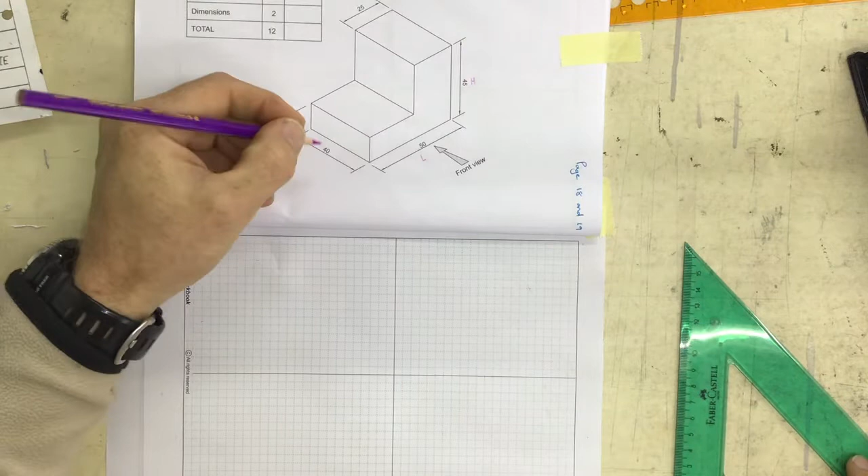Looking at this first angle orthographic projection, they've given us a front view which gives the length of 50 and the height of 45, and you've got a width of 40. I'm going to start out by getting those three major dimensions.

I'm going to measure up 2 blocks, starting point over there, and measure with a construction line, drawing that line coming across, then measure out 50 millimeters because the length is represented in my front view.

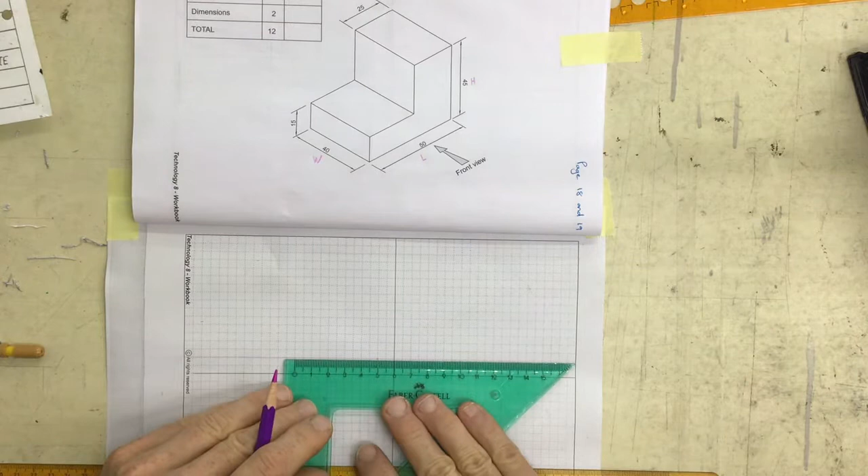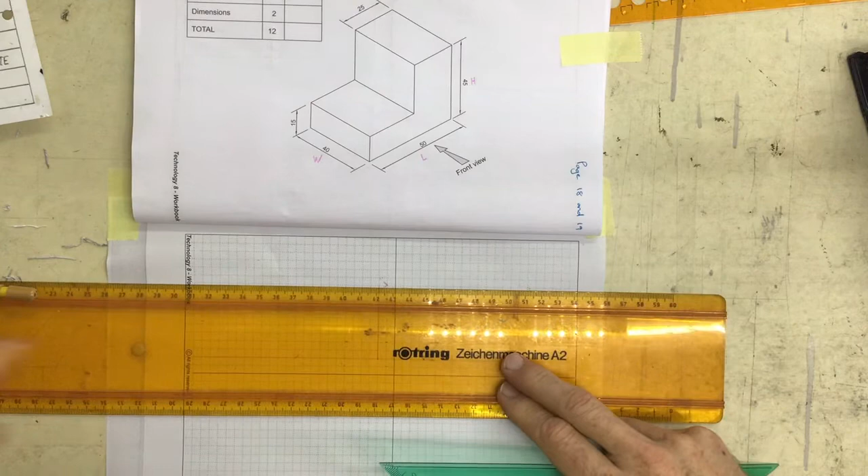Make a little arrow there. I then measure up 45 millimeters, that would be over there, and I can draw a construction line going up 45 millimeters to that point, then draw a construction line coming across at that height.

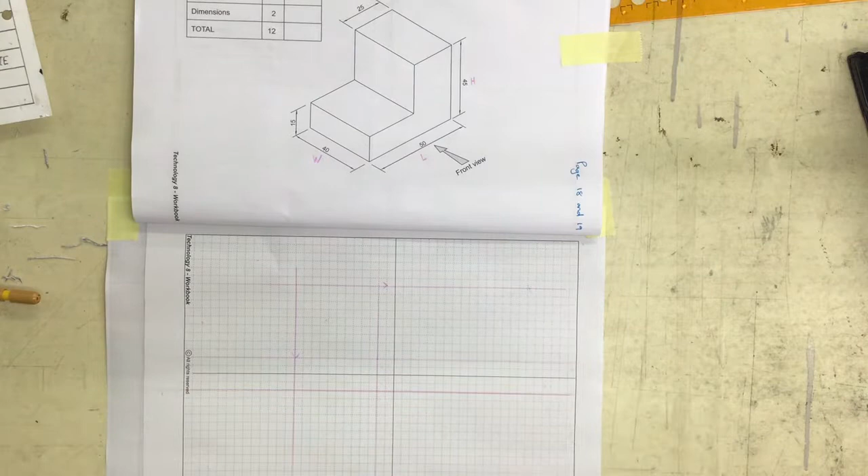I'm going to drop that line down into the top view as well, and drop a line down over here into the top view. I then come over here and measure down 2 blocks in my top view, and draw a line going across. You can see that the length there is the same as the length in the front view.

The front view is a little bit more challenging than the last one. We need to measure up here - it says 15 millimeters. So I'm coming across and measuring up 15 millimeters, drawing a little arrow there.

Let's use a slightly different color so you can see this idea - find a nice blue crayon, sharpen that up. Make sure you're using sharp pencils the whole time. There we go, nice sharp pencil.

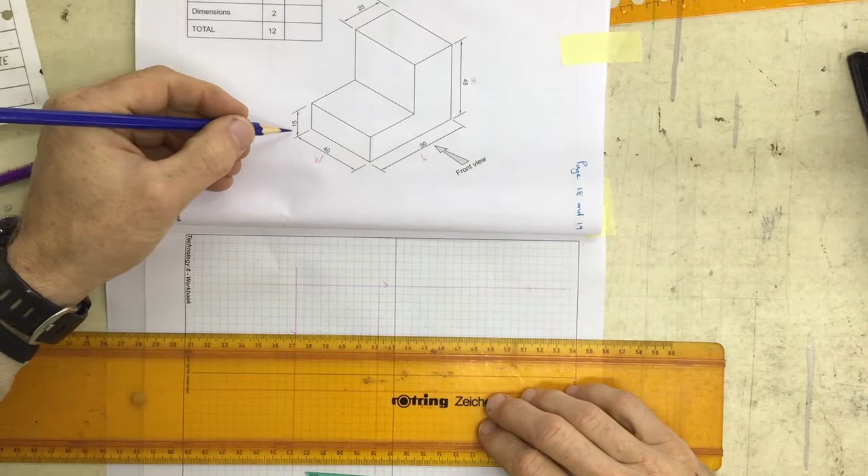I'm going to measure up 15 millimeters, so up 15 millimeters, and draw a construction line. I'm going to take that across, into my left view over there.

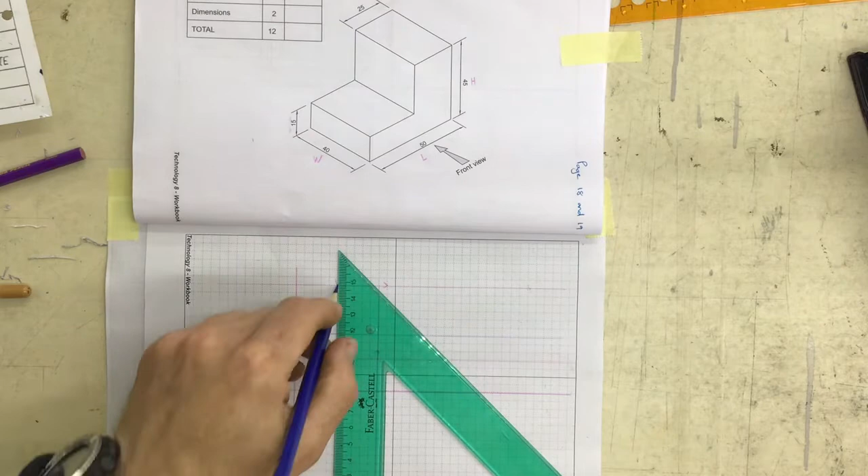I then need to measure 25 millimeters coming across here at the top. So I come along and measure 25 millimeters across, put a little arrow there, and drop that down into my front view and my top view.

It says over here the width of this thing is 40 millimeters. So I'm going to measure 40 millimeters down and draw a little arrow there, and draw a construction line coming all the way across.

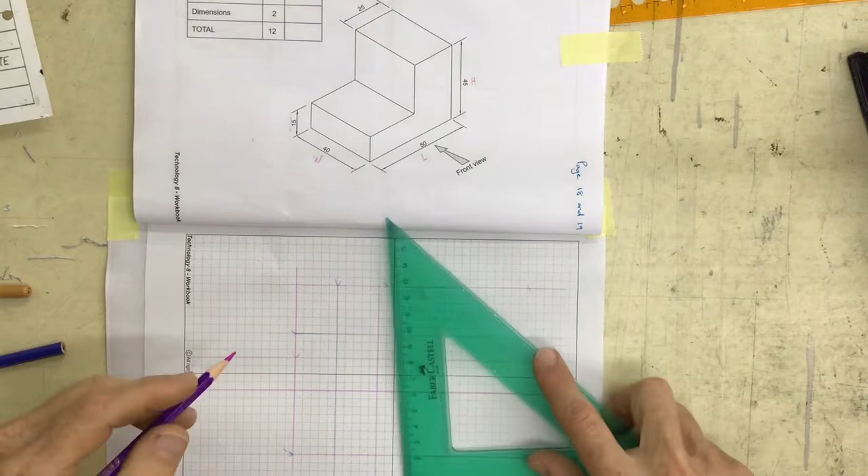What does my front view look like? I'm going to darken in a line coming all the way from the top, that is 45 millimeters coming down. I then measure 50 millimeters across at the bottom - you can see the construction lines helping me draw this.

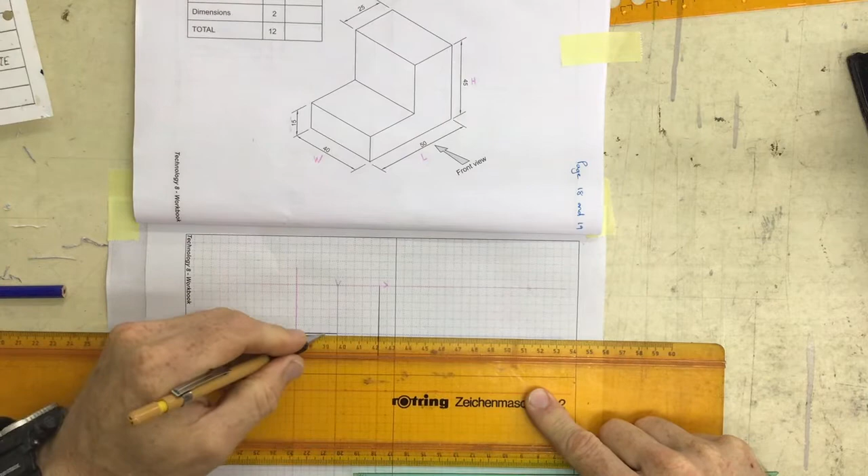15 millimeters going up here, comes across to this construction line that I dropped down from that 25 millimeters across. Drop that down and draw a line going across. You can see that L shape you've got is now represented in my drawing. Just want to check that - yep, that is correct.

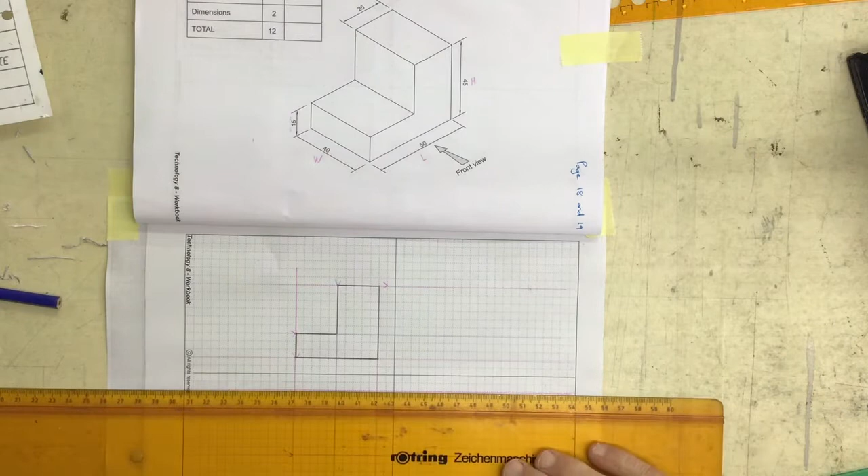My top view - what is it going to look like from the top? If I'm a little bird looking down, what am I going to see looking straight down on top of it? I'm going to see a line at the back, a line at the front, and a line for this corner at the top.

I'm going to see a line going across the top for that corner, and a line going across from that corner as well. So I've got that in place, and I can now look at drawing that left view.

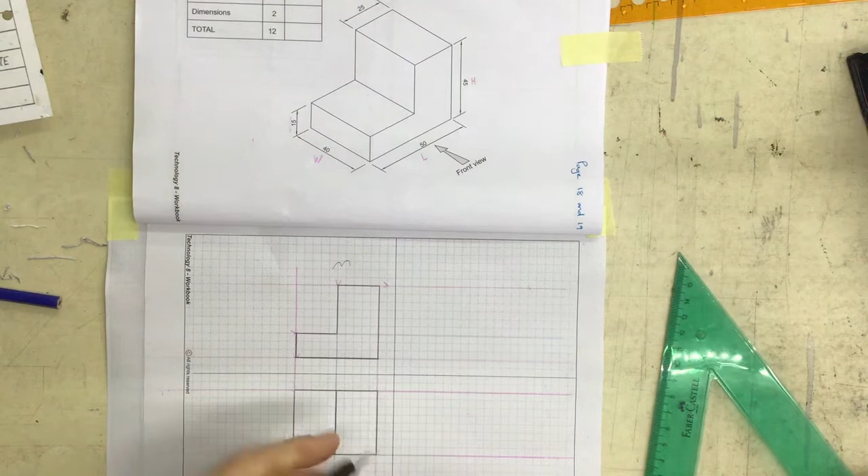You'll see I've got some lines going across there, and some lines going across here. I want to transfer what I've got over here into this view, and the way I do that is I count 1 through 12 blocks going down, and I'm going to do the same over here - 1 through 12 blocks.

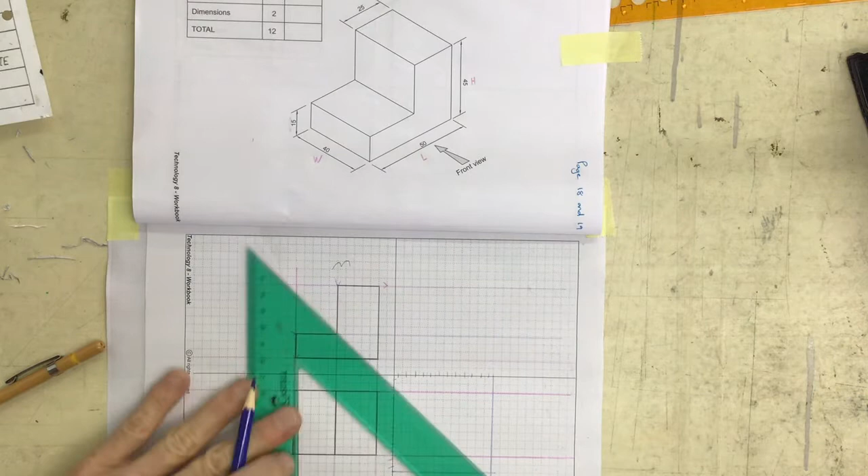I'm going to drop a construction line coming down, and draw a construction line coming across from the 12th block, which gives me a 45-degree angle. I can now draw that in from that corner, going all the way down, and that 45-degree angle is going to help me transfer these measurements across.

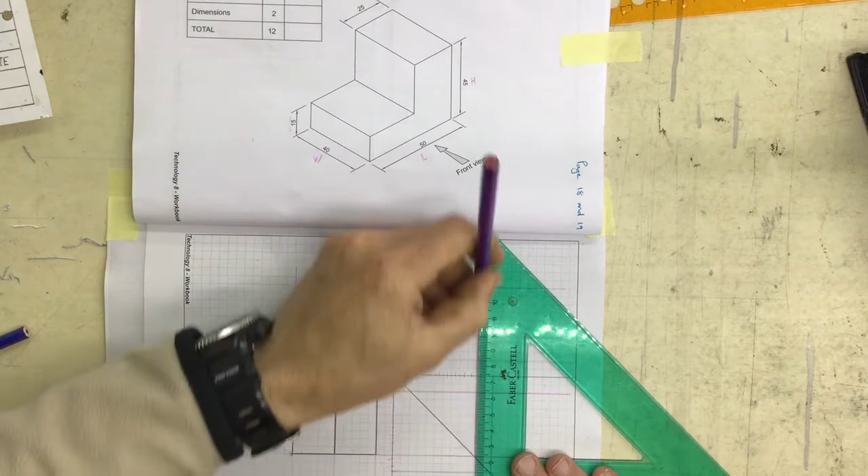You can see this construction line coming across here, and I'm going to draw that construction line going up into my view. There it goes. I come along here, see that construction line coming across, and I'm able to draw a construction line coming up.

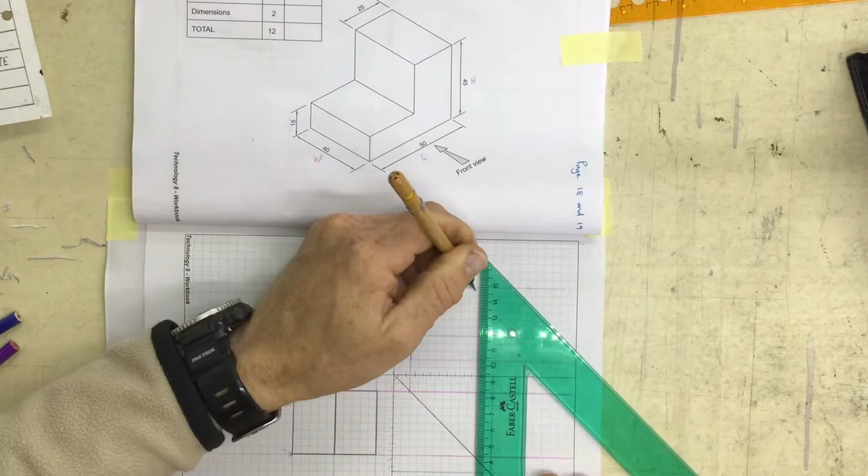Note the width over here is going to be transferred to a width over here, and it's the same width that is transferred. I'm going to see a line at the edge like that, another line at the edge like that, and I'm going to see the bottom of it.

I'm going to see the top of it. And if I'm standing here looking across at this thing, I'm going to be able to see that little corner as well. So I've got an edge going across there where that corner is. And that is my left view.

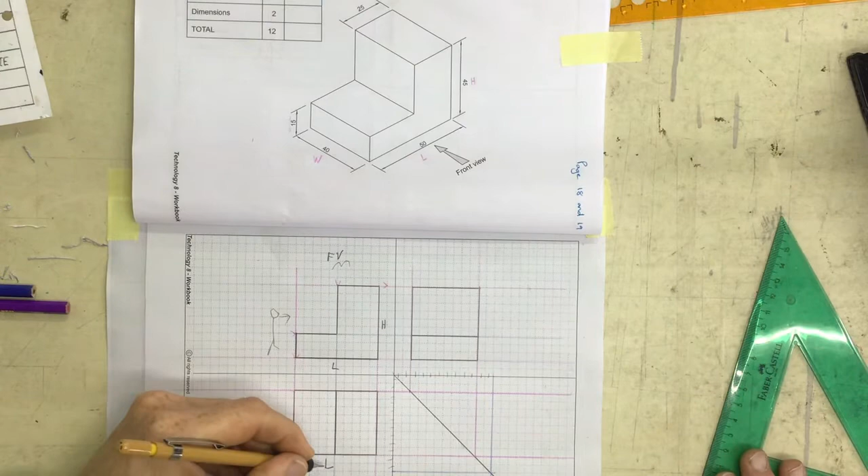So I've got a front view showing a length and a height. I've got a top view showing a length and a width. And I've got a left view showing a width and a height. So that's the left view, the top view, and the front view. There we go - there is our first angle orthographic projection done.